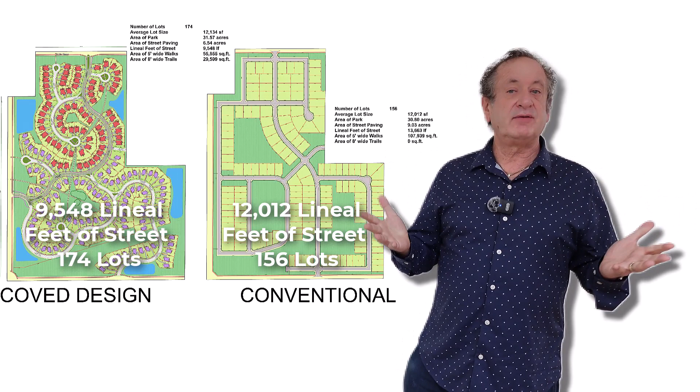The typical development that we have designed has a demonstrated 25% reduction in street length. Now, every development is different, so maybe it's only 5% of one development, or maybe it exceeds 50% in another development. Every development is going to be different.

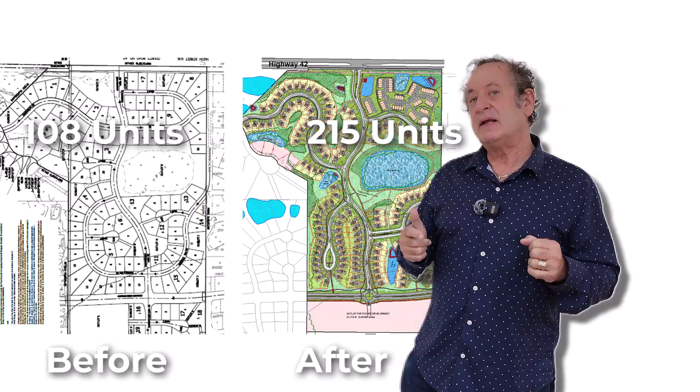It doesn't necessarily mean it's going to be 30% less cost to develop land, because there are some costs that go up. But in the end, you're going to end up with a much more beautiful and exciting neighborhood that certainly isn't going to cost any more than if you were to develop on a conventional method. But the key thing is we're working with real numbers here.

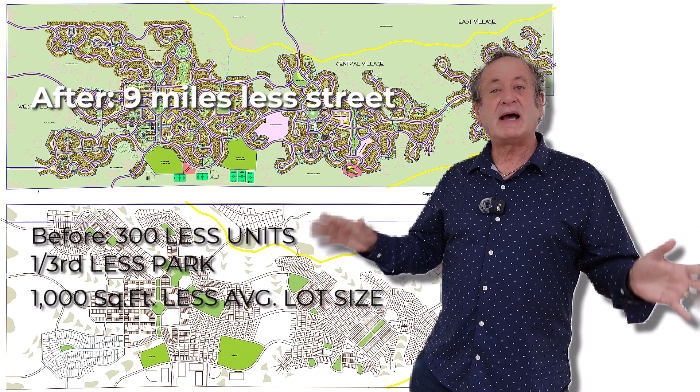A 20% reduction in street length is 20% reduction in the length of sidewalks that go along the street. It's 20% reduction in the utility main. So in other words, we're reducing the right-of-way that would have otherwise been dedicated to the city, and we're putting it into sellable lots. So instead of the developer buying, like, 40 acres and giving 10 of those acres back to the city and saying, here's your streets, maybe we could reduce that 10 acres to 7 acres, and then that 3 acres is spread out through individual ownership to increase the property values.

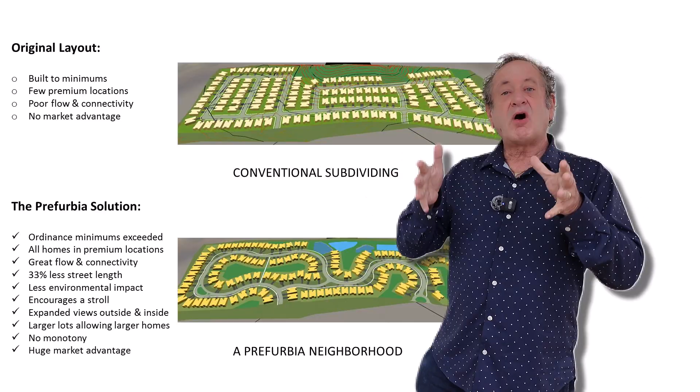So from a city's perspective, the cost of maintaining all that infrastructure plummets, and from the developer's perspective, the value of the lots increases, and then from the city's perspective, because you have higher value real estate, what you've got is more tax base.

If you look at the past 100 years, from an architectural perspective, about every decade, there's a new architectural facade or model. For example, in the 20s, the homes had a beautiful big front porch, because there's no air conditioning. But what happened is around the 30s and 40s, you saw the porches disappear, and people wanted to live in their private spaces in their backyard and not be so social in their front yard.

And then in the 60s, the homes got wider, the 2-car garage; the 70s and 80s, the 3-car garage. In fact, in the 70s and 80s, the home was garage, and then the home hid behind the garage in a lot of these models. And now we're coming into an era where we're going back to a front porch look, but the homes are still oriented to the back. So that means that you've got this front porch, but nothing really pushes you to that front porch.

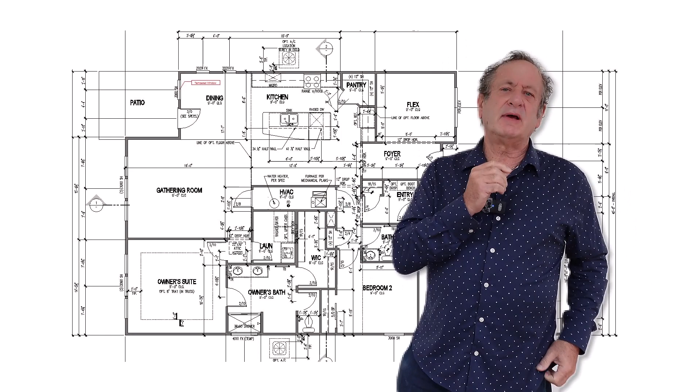You might notice that decade by decade facades change, but when you look at the interior floor plan of a house, for the last half century, it's hardly changed at all. But what if the concept would be, when you're designing a home and you're designing the neighborhood, if you have all this new open space around the home, why aren't you designing the interior floor plan, the walls and the window placement, so that when you're in the home, you enjoy that extra space?

For the past few decades, where we've really made progress is in this merging of architecture and planning to create a higher form of residential living. It began with a unit we call the bay home, which is essentially a rear-loaded, narrow but deeper single-family home, full front porch, staggered so that living spaces get a panoramic view of common space and not looking over a street with parked cars. This method significantly plummets the amount of pavement and the cost of development while increasing green space and increasing density while still providing a suburban sense of space.

Another architectural method that we pioneered is called architectural shaping. For example, this is Trasona in Viera, Florida. Every home is shaped because we're holding a constant angle between the two lot lines. That means a home can get wider in the front or wider in the rear. And we brought that up to address the narrower 35-foot and 40-foot wide products.

But Viera Builders decided to throw out all of their floor plans and start fresh to have it on all of the 1,350 homes that they built in Trasona. And we demonstrated a 38% reduction in street length compared to the previous plan. And this added 19.3 acres of usable land in the north section of this neighborhood alone.

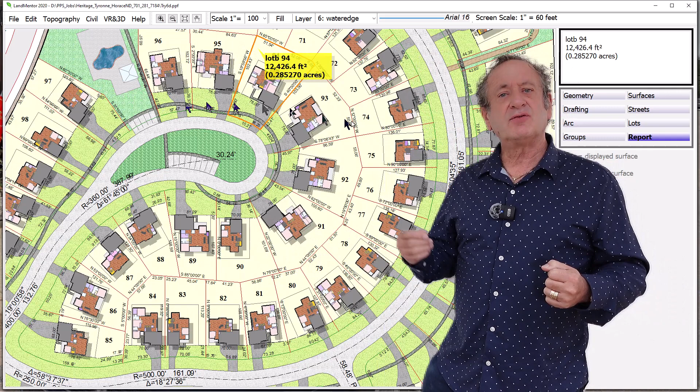Now, none of this would have happened if we used the same CAD-based products of every other consultant. So for the past 2 decades, we've been developing what we market now as LandMentor. 22 years ago, I sat down with my programmer and we said, why can't software be easy to use in civil engineering and surveying? We eliminated commands. CAD has thousands of commands. We have none. We wanted to make a user interface that was fun to use while expanding the capability beyond CAD for land surveying, civil engineering, planning, architecture, and much more.

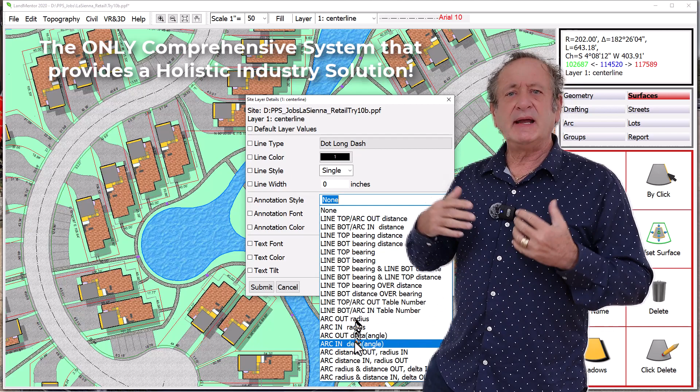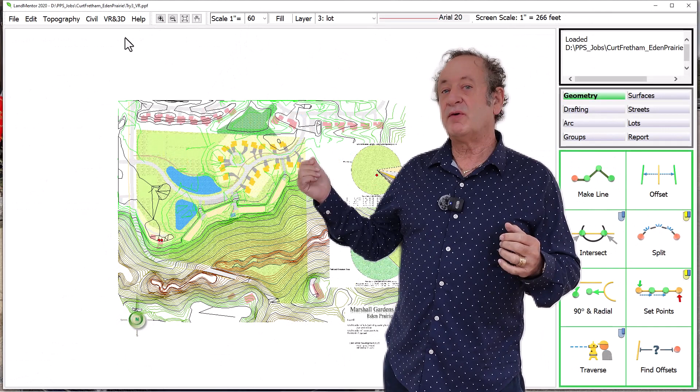When was the last time as a land developer or even a city that you saw 3D as a normal deliverable? In this era, we're still looking at 2D plans nobody can understand. So 22 years ago, Keith and I decided to use video gaming for the basis of our software 3D. So the trick is to go from a seamless 2D working environment into a 3D environment with the least effort.

And every site that we design, we deliver 3D at no extra charge. But not just 3D, we deliver it in a format that the clients could just click a file, open it up, and they could play their site just like a video game, using an Xbox 360 to move about the site, go in the homes, look out the windows, and experience what they are.

But more important, they could don a VR headset and they're no longer looking at a 2D plan or a screen in 3D. You're projected into the development, and we were the first on the planet to use virtual reality in public meetings. But that's not what the cool thing is about LandMentor.

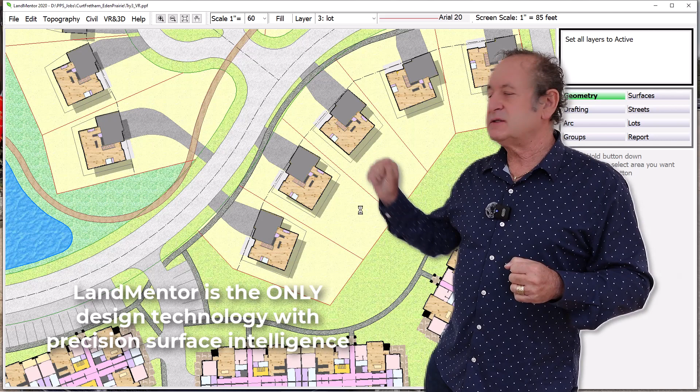When you look at the colors and the textures and the detail that we deliver, each one of those colors and textures represent a man-made element that we're adding to the ground. In a CAD-based system, to get this kind of data, you would take weeks or months instead of seconds or minutes added to the plan in LandMentor. And that gives us the power to analyze the efficiency of a plan and report it.

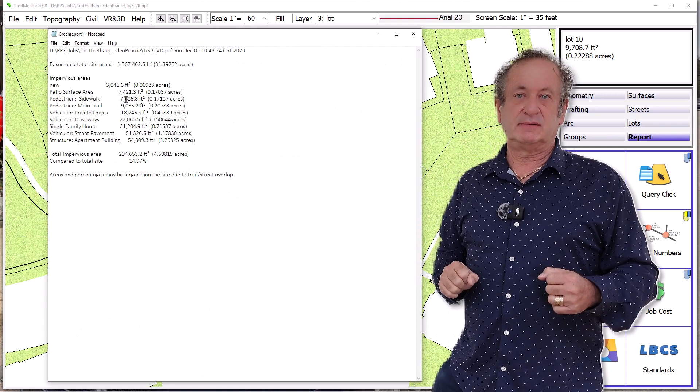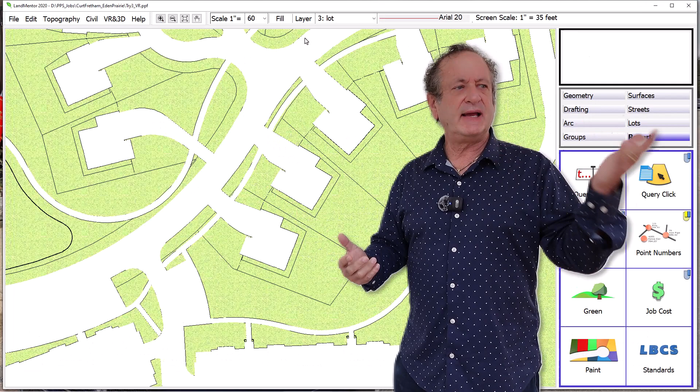So we've developed a technology that doesn't take months or years to learn. It takes days or maybe a week to learn. And this includes all of the civil engineering, surveying, planning, everything. We could reduce the learning curve. Instead of schools teaching months or years of a degree on how to use CAD, they can now take that time to teach people to think differently and think better and replicate some of the benefits that we've brought to

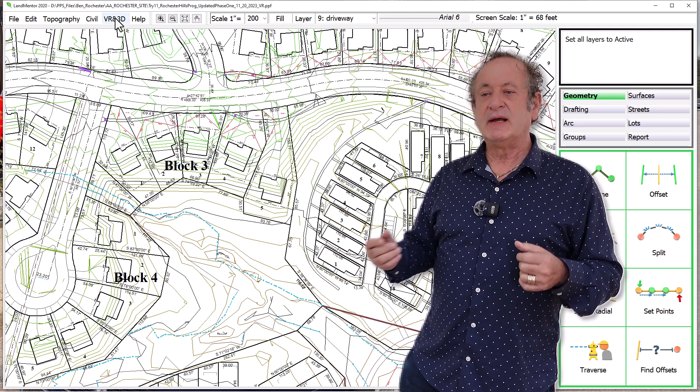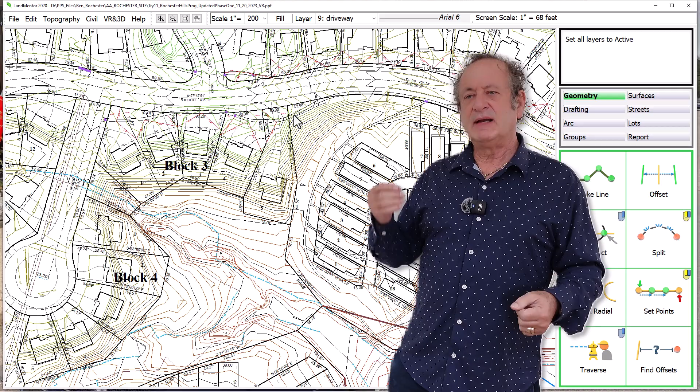the development industry. I believe that we can create a new generation of planners, architects, engineers, and surveyors that are better equipped to create better communities for everybody in this world. And I just don't mean better by having more space or views, but better because less infrastructure is less environmental impact, it's less cost, and it solves a lot of issues and a lot of problems.

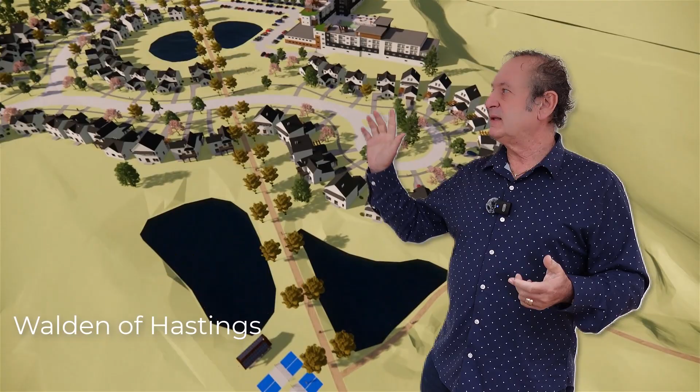There are roadblocks. For example, you can have some software that designs the neighborhood in just a matter of minutes, if not seconds. And this is why we have developed the methods, the technologies, and the training, not just for consultants, but for developers and builders to make better decisions, for cities not only to make better decisions that could significantly reduce their infrastructure, their cost of maintenance, and increase their tax base while helping solve the affordable housing situation.

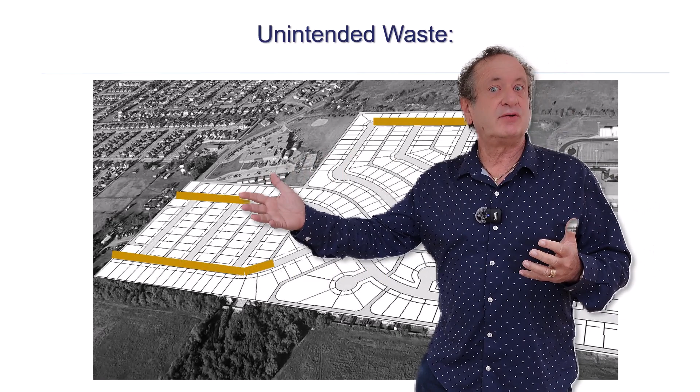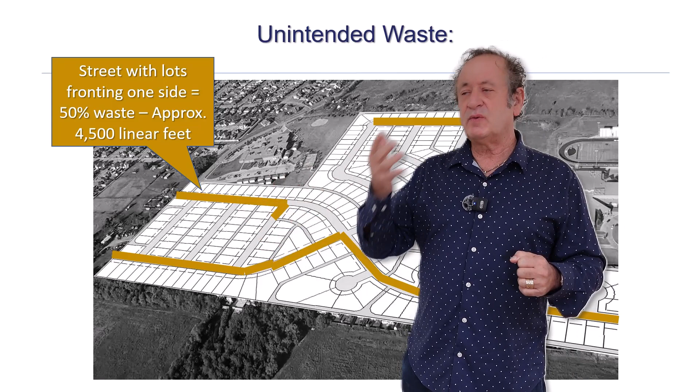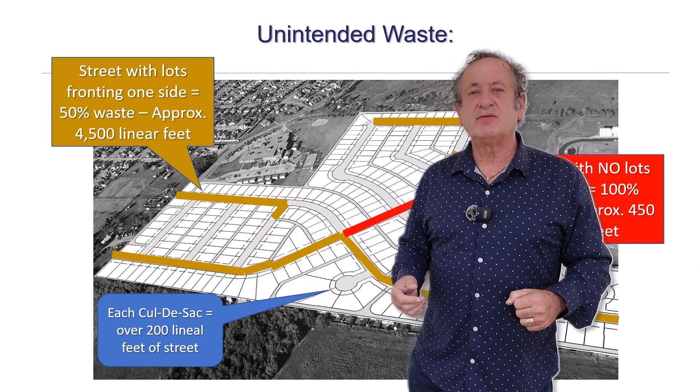And instead of looking at a 2D proposal that nobody understands, using drafting standards from the 1800s, we can empower cities with VR systems and better technology so that when a proposal comes in, they can communicate to a developer, hey, you're building an extra mile of street. You don't want to spend an extra $5 million on that street, and we certainly don't want a mile of extra street to have to maintain forever. Why don't you take that right-of-way, put it in your lots?

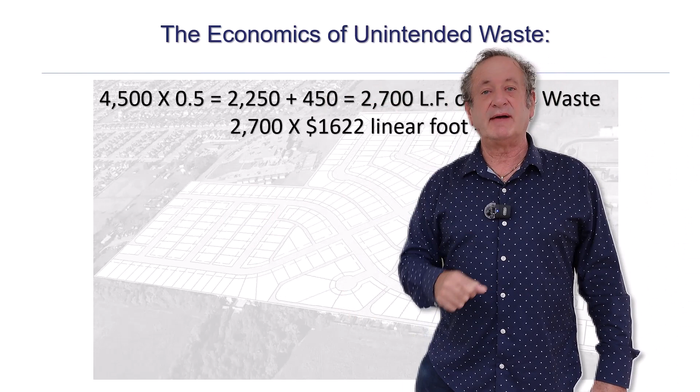But cities don't have that feedback because they don't have the technology that we developed and they don't have the training that we developed, which opens up entirely new possibilities for the entire land consulting industry. Developers who pay the consultants need to understand this and hire consultants that want a new era instead of just blindly doing another gridded subdivision. But what goes in that ground is going to be there for hundreds of years and affect thousands and thousands of people. Something that's done quick instead of done right. Because that land plan is the developer's business plan and will make a major difference for the builders to sell their homes.

So in conclusion, planning shouldn't be about social engineering. We shouldn't use the car as a scapegoat and say we're destroying the world because of the car, but as a result, for pedestrian connectivity, let's build a whole lot more street and make little tiny blocks so that we actually increase the cost of development and decrease the green space. We believe in the opposite. Create more efficient and better design. We increase the livability without increasing the cost.

And we've been very fortunate that over 300 developers for the past 30 years have retained us to design 1,700 communities in 48 states and 18 nations. And the income from that has gone to develop this technology that could benefit the rest of the world, leaving a legacy that will last forever.